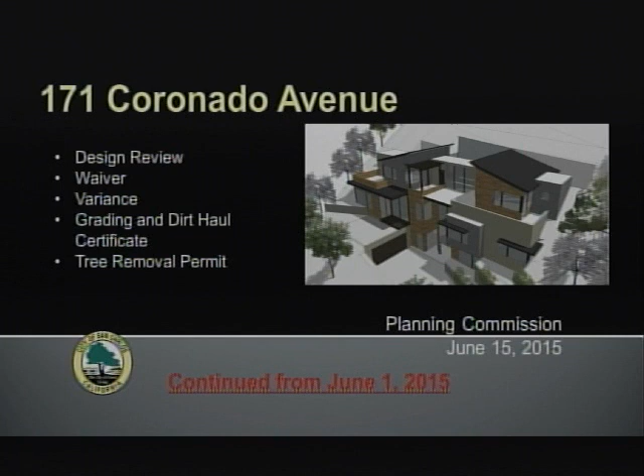So a summary of the Planning Commission meeting from June 1st. At the meeting, the Planning Commission heard the staff report as well as the applicant presentation and heard the request for the aforementioned entitlements. Several neighbors expressed concerns and the applicant also tried to respond to as many questions as possible. The Planning Commission specifically expressed concern with 3 aspects of the proposal and directed the applicant and staff to return with additional information with regard to these areas.

The first was in regards to a waiver that the applicant was requesting from the overall height requirement. The applicant was asking to have a waiver for an additional 3.5 feet in height, and the Planning Commission asked for a shadow study to determine the shading impact of that additional 3.5 feet on the downhill residences, specifically those across the street.

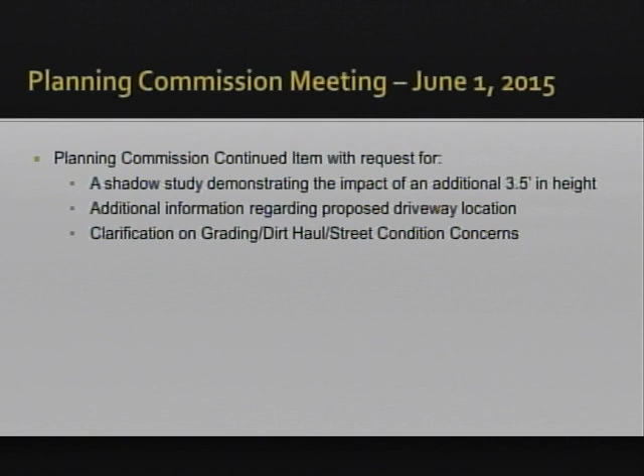Second, the Commission requested additional information regarding the driveway location. And finally, the Commission asked staff to follow up on concerns expressed by neighbors regarding grading and road conditions.

To start with the waiver request, as you are aware, the applicants are requesting a waiver to increase the overall height by 3.5 feet, which would raise the overall height to 38 feet, 6 inches as measured from the lowest point on the site to the highest.

On this slide, the red line indicates the maximum 35-foot height. The clouded areas are the areas that exceed that height limit and the reason for the request of the waiver. The line weights are a little light, so it's a bit difficult to see, but it's that area within the 2 clouds. As you can see, the area that extends past the maximum height is solely roof area.

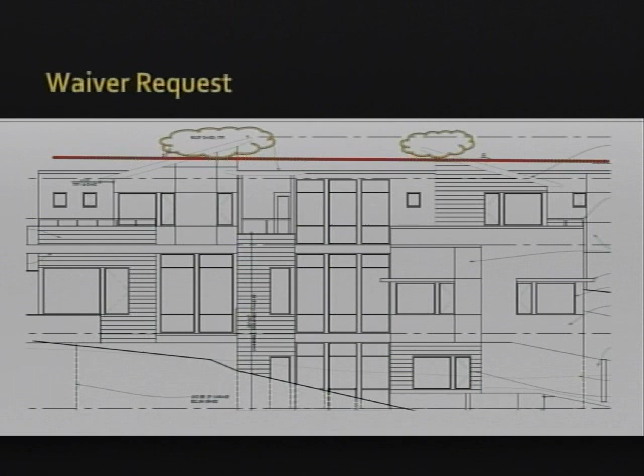As I mentioned, the Commission asked to see a shadow study to see what impact this would create. The applicant will be presenting on this a little bit more, but I just wanted to show a few different slides with this. This one specifically is the date, December 21st, and time 9 a.m., where the shadow is the longest.

The picture on the left is the flat roof, so were it to stay at 35 feet maximum allowed height, and the one on the right is the sloped roof. I clouded the areas where there's a difference, and as you can see, there's not much of one. It's a pretty minimal difference between the 2.

As I mentioned, the applicant will go through other times of the year and times of the day. Staff's opinion is that the sloped roofs would provide more architectural interest than the flat roofs, and is recommending approval of the waiver to allow this additional height, given that the shadows cast by it are pretty minimal compared to what is allowed.

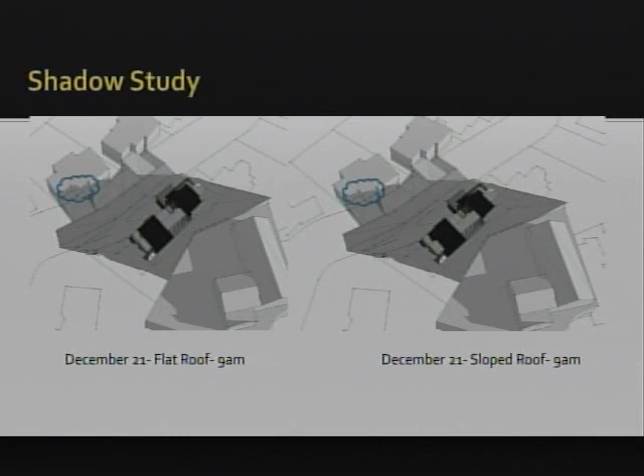In terms of the driveway configuration, the location of the driveway was reviewed with both Public Works and Fire. Public Works prepared a memo for the Commission, which is available on the dais and was also over there for anyone in the public who would like to see it. No objections were brought up with regard to the location of the driveway.

Public Works noted that the location of the driveway is no more dangerous than other locations or existing driveways within the neighborhood. In addition, all vehicles exiting driveways need to take caution and make sure conditions are clear for exiting regardless of the driveway location. Although not required by the city, the applicant could provide a backup area which would allow the car to exit face forward. In addition, there's no parking on the street, which will help with visibility.

As you are aware, the applicant is also proposing to remove several trees, some of those between the property at 171 Coronado, the subject site, and 181 Coronado. Removal of those trees would allow for greater visibility as cars proceed down the hill towards the street.

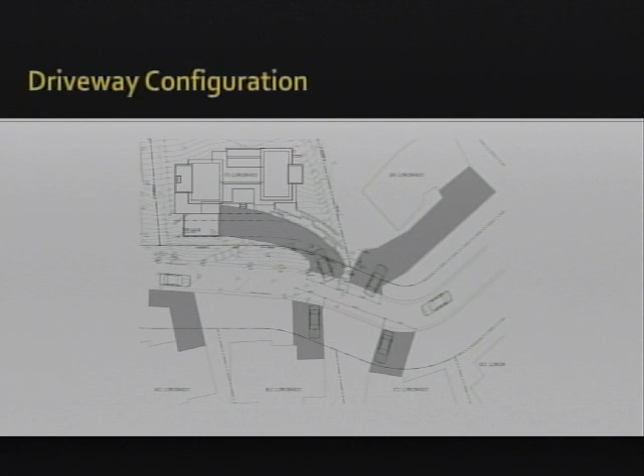Alternatively, the Planning Commission can require the garage to be located along the west portion of the lot, with the exit at the east or another alternative. If this is desired, more analysis would need to be done to determine where the driveway could exit and still maintain the 18% slope. The applicant has prepared a rendering showing the visual effects of relocating the driveway and will present on that shortly.

There are several items in terms of clarification with grading and also the dirt haul routes. A few things I wanted to bring up. Based on review of the concerns and discussion with the different departments, staff is proposing some changes to some of the conditions in the grading and dirt haul permit. The revised permit is at the dais and the changes are in blue. I'm going to go through each of those.

First is changing the dirt haul route to specify the difference between empty and full trucks and the route that each will take. The updated route will ensure that trucks do not need to turn around on the street or on site, which was a concern, and I will review the route shortly.

Condition number 18 has been removed, as conditions 27A and C have been revised to allow more discretion for the city in terms of what measures are taken to control dust as well as clean up roadways.

Condition 28 has been revised to require the pre and post construction survey to include from the site itself along Coronado to Windsor and Devonshire. This is with regard specifically to damage that any equipment might cause the roads. A pre-construction survey would be required, as well as a post-construction survey, so that the city may determine what damage was caused by the project and have that be repaired prior to any building division final.

And then the last condition, number 29, has been added, which would require all people along the dirt haul route to be notified 10 days prior to commencement of any grading or dirt haul activities.

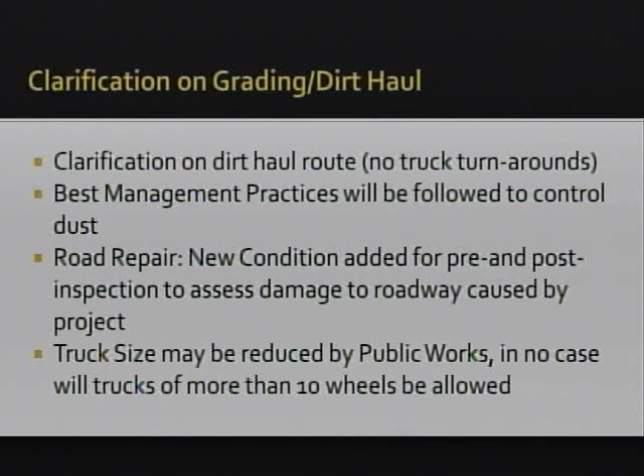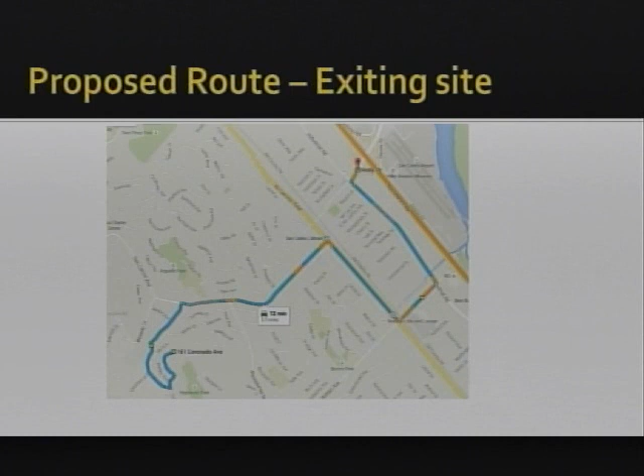The applicant also agreed to several conditions in response to the concerns, specifically limited construction hours, limited grading and dirt haul hours, and limiting the height of the trees to the rear so the rear neighbor's view will not be blocked. The applicant is also adding trees to the right of the property to help with privacy for that neighbor, and is proposing a revised landscape plan, which is up at the dais. This is different from the last landscape plan you saw on June 1st, and includes additional oaks being planted, which was another concern.

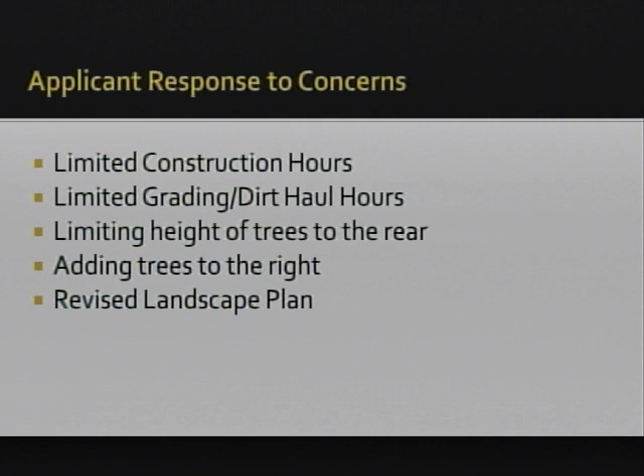Prior to closing, I wanted to mention that we received 3 emails after distribution of the staff report, all of which were provided to the commission and included as part of the administrative record. Staff is recommending that the Planning Commission approve several entitlements, including the code compliance certificate for design review, which includes the request for the exception for the garage setback and window trim, a waiver to exceed the overall height limit, variances for the natural state and downhill building face, the tree removal permit, and the grading and dirt haul certificate.

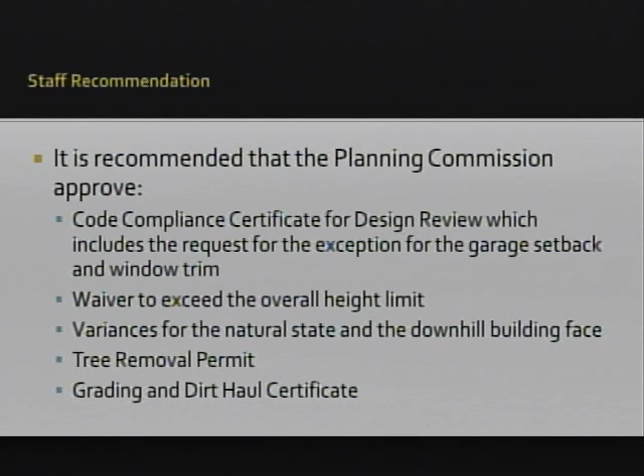Should you choose to approve this item, this is the formal motion you would make. I'm available for any questions, as is the applicant. Thank you.

Does anyone have any questions for staff at this particular moment? Not at this moment, no. Through the chair, if you'd like to wait until the applicant presents his presentation, we can take questions thereafter as well. That's fine. Okay, does the applicant have a presentation?

So just click this to go forward. Thank you, Andrea. My name is Ryan Morris. I'm the project architect for this, working with Ray Viotti at Viotti Architects, as Andrea mentioned.

Since a couple of you weren't here last time, I want to quickly talk about some of the challenges of this property to give more clarity to the decisions we'll discuss in a minute. This particular site is one of the more challenging I've dealt with, with a 62% average slope. As you can see on this diagram, the property line is above the street, that's the boldest red line on the left, by about 9 or 10 feet. So you're not even walking on the property until you've hiked up the hill and inward from the street.

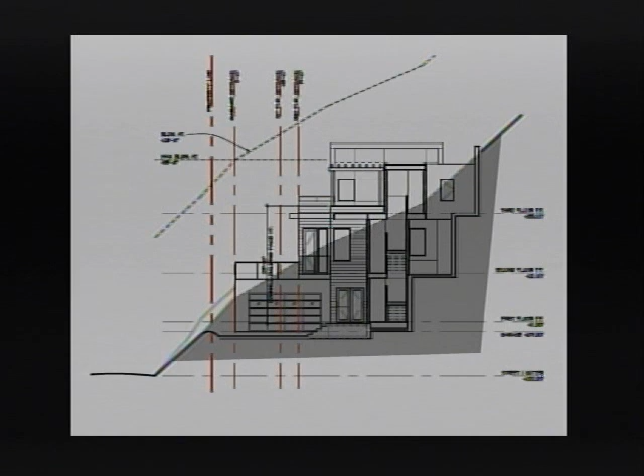We've done our best to minimize the massing of this structure. That was one of our primary goals, to keep it from being a bulky, looming mass hovering over the street, and gently step it up the hillside as much as we could. You can see the retaining walls that are below grade are stepped, and the front of the house as well, from the garage to the first floor to the second floor. We're trying to move it back up the hillside and break up the massing, articulate it.

It was asked at the last hearing that we do a sun study because of the building height and the waiver that we're requesting. So the following is going to be about 16 slides, I'm going to go through them quickly. The first 8 will be in the spring when the sun's higher and the shadows are not as exaggerated. The last 8 will be December 21st, the winter solstice, the lowest sun angle of the year, so it's the most extreme sun angle.

You'll see 4 different times of the day in the morning, from 9 a.m., 10 a.m., 11, and 12 noon. At each of those time periods, we'll compare the sloped roof and the flat roof.

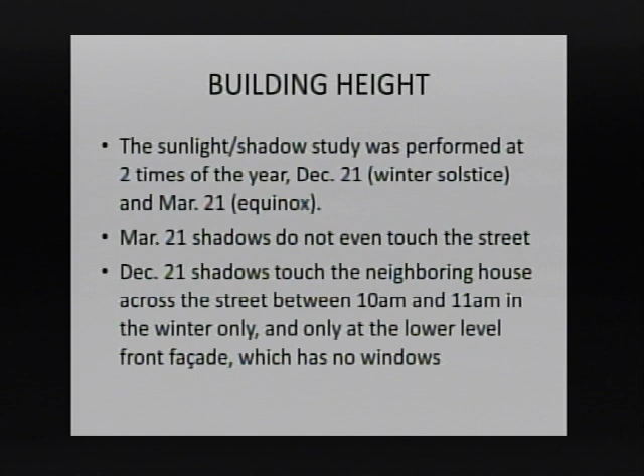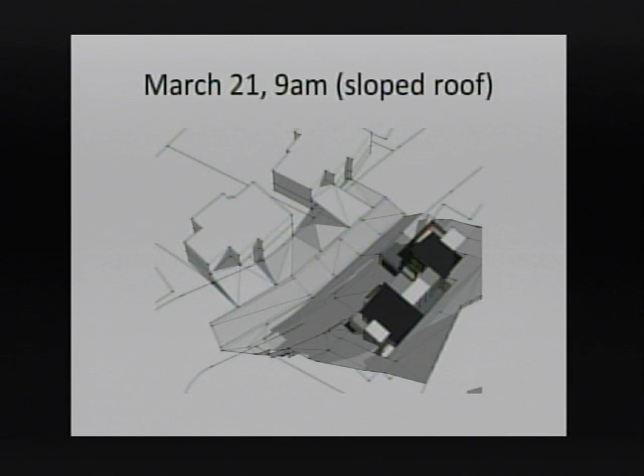So as I said, this is March in the morning. To orient yourself, the sun rises on the top right corner of this diagram, and it continues downward on the page to the bottom right, from east to west, and south side is on the right side of this image. You can see the shadows moving across to the right.

And now we're doing the same time of year with a flat roof. Okay, I'll go back and do that one more time. It kind of helps to go quickly. You can see the sun moving.

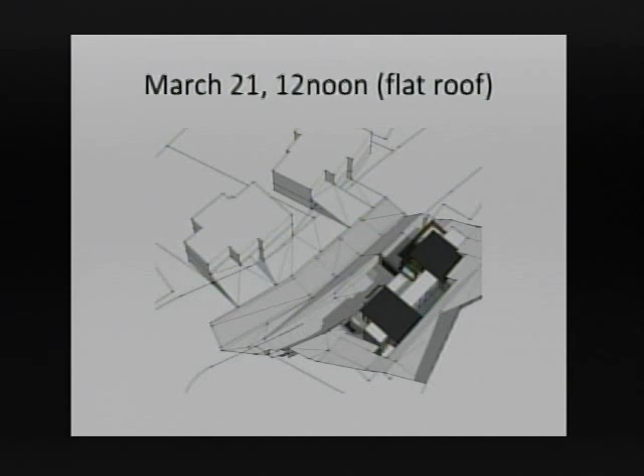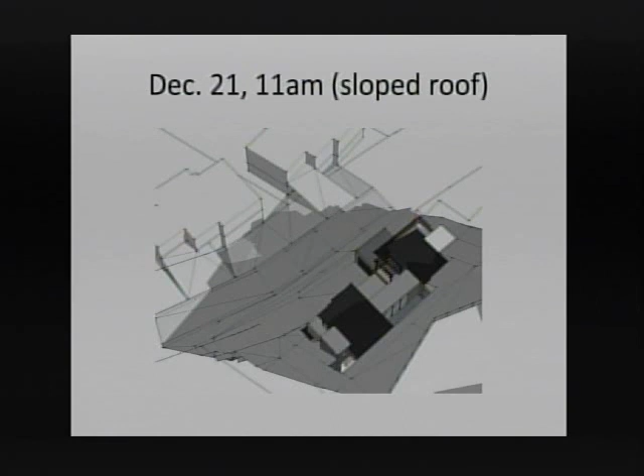At 10 a.m., the highest point of the shadow is about at the bottom of the front door. That line below the roof represents the first floor. And at 11, this is down at the level below the street, the shadow that's hitting the building. You can see the sloped roofs pretty clearly here.

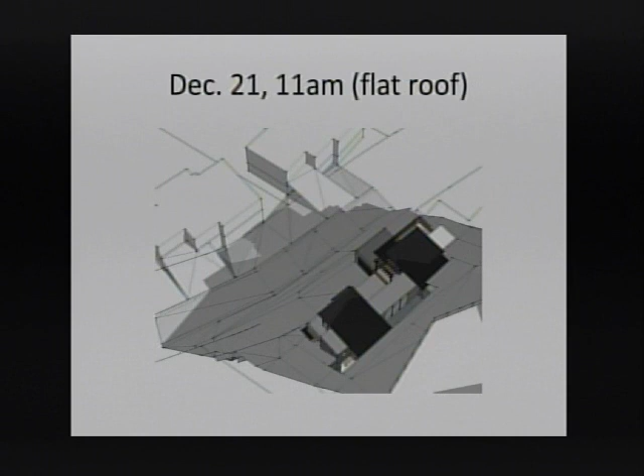And then with the flat roof, same shadows being cast across the front door of the neighboring building. Shadows don't quite touch the bottom of the front door. And then they disappear. There's the clear definition of the flat roof. I'll go through that quickly again, just for fun.

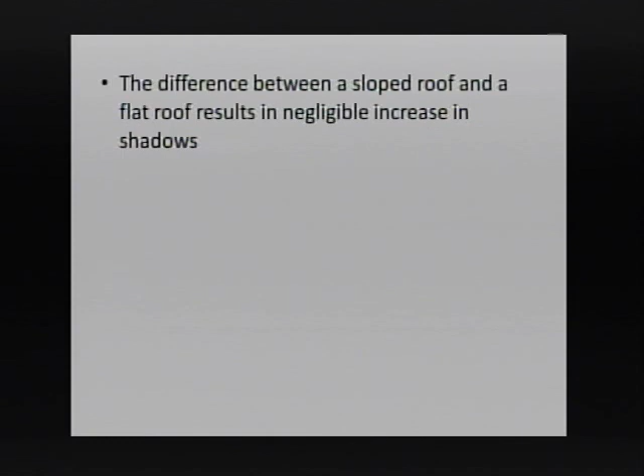In the winter, those few months or weeks, however long that may be, when the sun angle's at its steepest or most severe, it's not really affecting a whole lot of their interior spaces. And for that matter, the difference between a flat roof and a sloped roof we think is negligible. I think that's the reason this whole question came up, to see if we did not need the waiver for the sloped roof, if the neighbors could benefit from a flat roof. I don't think there's enough difference to make that case.

Another question that came up at the last meeting was whether the building height will block views from the neighbor above our house. As you see on the next image, the highest peak of our proposed roof at 171 is at least 20 feet below the deck of the property above us. No views are affected, and there's the exact measurements.

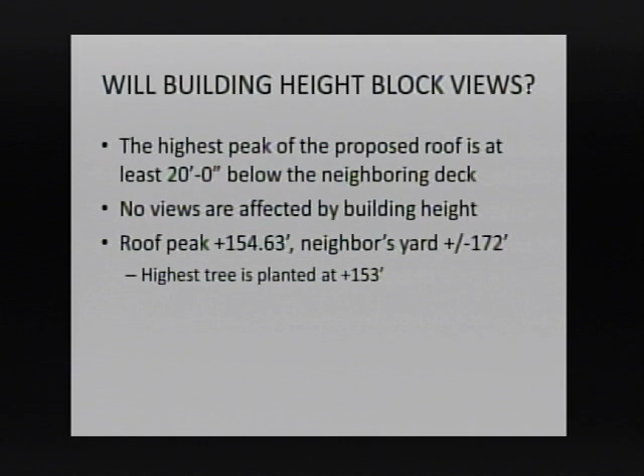We've also planted trees, which were a concern, and the highest tree's base is planted at 153, slightly below the roof peak. There's a measurement that's hard to read, but the distance isn't important. What you'll want to see is just how high above the roof of 171 the neighboring building is. Any trees would be planted at the roof peak or below.

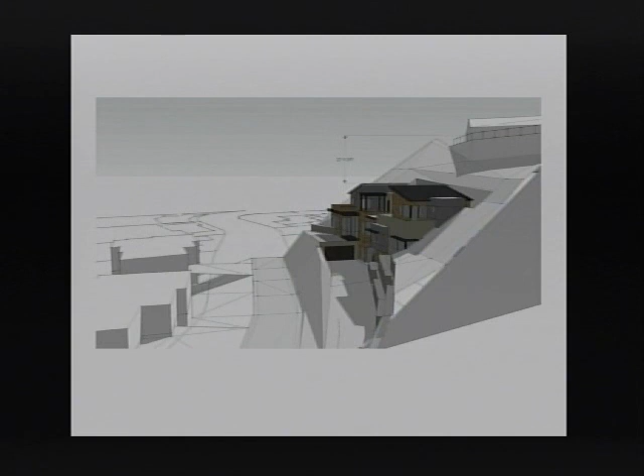Driveway location. We'll deal with this in several separate aspects, we'll study several separate aspects of the driveway.

One topic that came up was the separation between the two driveways at 171 and 181 Coronado. The separation that we measured after the meeting was almost 7 feet, about 6'10". Both driveways, as they enter the street, start out almost parallel to the street, but when the curb cut happens at the street curb, they're pretty much perpendicular to the street. So it's not like the cars are running into each other.

Furthermore, there's a fire hydrant and mailbox in between the two properties, and a retaining wall that's set back from the street curb about 4 or 5 feet. It was asked if we could provide bollards to prevent hitting the fire hydrant from our side of the driveway, and we're perfectly happy to do that.

And then the sight line from the driveway of 171 Coronado looking west towards the curved road has been a sensitive topic. Our property actually benefits from the retaining wall being pulled away from the street curb. It gives us more room to see towards that curved road, over the top of the fire hydrant and past the mailbox.

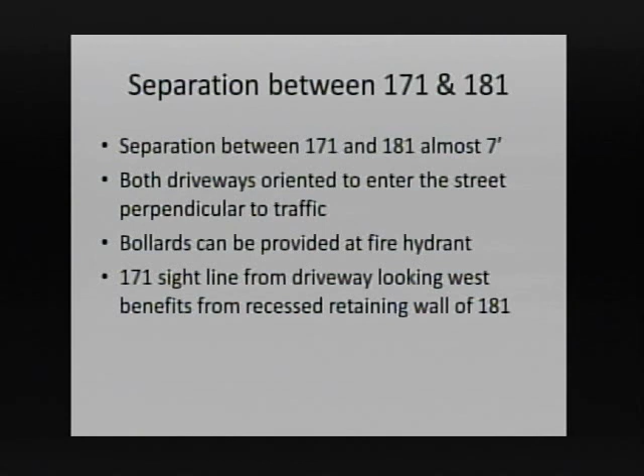And we are going to replace this tree with 6 more oak trees, 4 of which are on the property line border between 171 and 181.

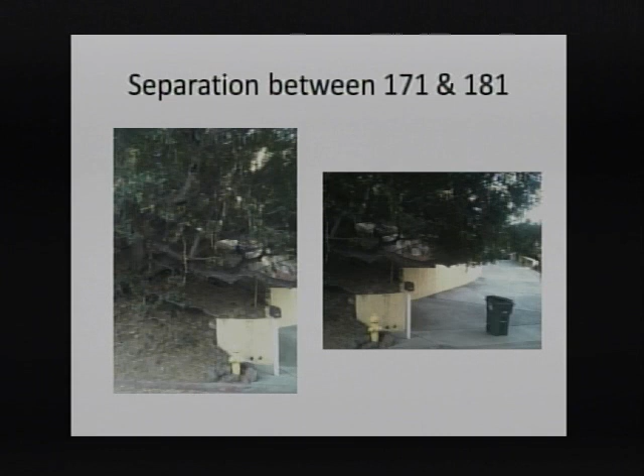The curved street, the road curves, Coronado Avenue curves from the west of 171, and it straightens out at 171. So our property is not on the curve, it's after the curve.

And we have provided adequate stopping area on our driveway on 171 in order for our clients to stop, watch for traffic, as I said, to look past the fire hydrant towards the curved road.

We're not aware of any San Carlos city standards that would require a different driveway design than what we've provided, or a specific sightline distance from the curve to the driveway. And we received an email today that said Public Works has no safety concerns for this driveway location.

Because this is sensitive, I'd like to point out that I don't think our driveway is contributing to the traffic safety issues. It seems like a pre-existing problem of this sharp corner, and other driveways exiting and entering into the street, and it seems like this could be solved by speed limit reduction, signs, sidewalks, other things that would benefit all neighbors, not just our neighbor.

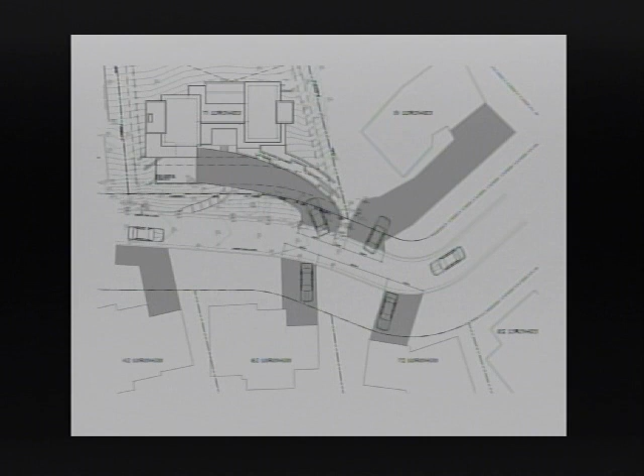Here's an early model we did when we looked at both driveway locations. This is a little exaggerated because where this driveway hits the street is actually where there's an existing street light. So if we did do this, the driveway would need to be even shorter than this.

I was not present, so I would just ask the question: if it's all the same to you, but the neighbors care that it's flipped, why wouldn't you flip it? Good question. Yeah, I've prepared some answers to that. Thank you.

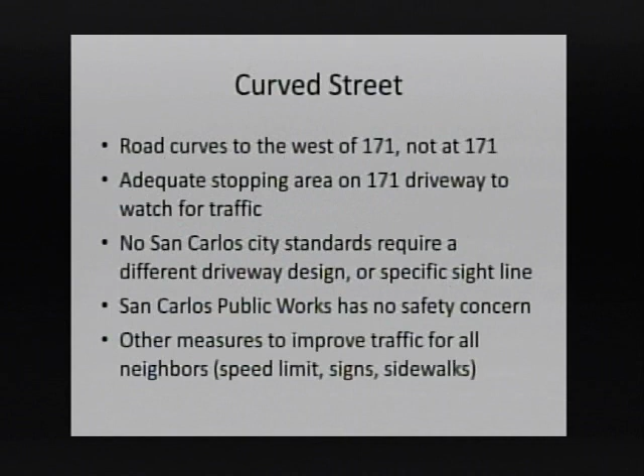First of all, there are 3 ways that we can improve the current design. Sorry, I'm just going in the order of my slides. We'll come back to it.

We can move the house 18 inches to the east. It is not right up against either the east or western setback lines, so there is room to slide the entire project 18 inches away from 171. We're happy to do so. I'll show you that on the next slide. It doesn't affect our design at all.

The second point is that we can provide a wider turnaround area at the top of our driveway in front of the garage. Technically it's not enough for a 3-point turn, it's more like an 18-point turn. Or if you bought a Mini, you could probably do it in less.

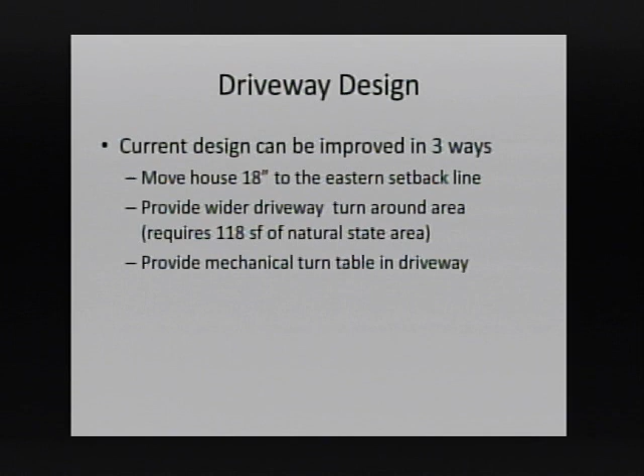But that extra room could be beneficial, especially if the third option is done, which we're not in favor of, but I'm just throwing it out there, that we could put a mechanical turntable in the driveway. This is done in San Francisco sometimes for tight garages, and you'll see right here, I've widened the rectangular gray area in front of the house to be 25 feet by 36 feet. That's option 2 that I discussed. And the turntable, typically they're about 15 or 16 feet, and it's a fancy luxury that we do not think is necessary.

But if it's important for the Planning Commission that our clients face forward when they're exiting their driveway, it is possible. You're not explaining why you wouldn't just flip it. Yeah, I'm getting to that. I think that at the last hearing, I apologize I wasn't there, but it was asked of us why, or whether or not we could face forward.

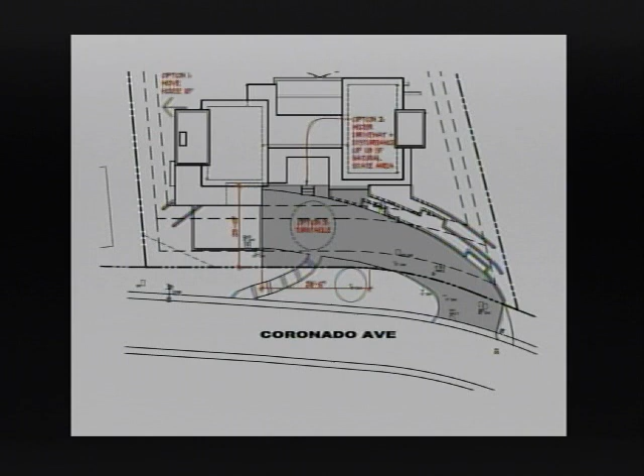Option 1 on the top left shows that there's a little bit of room to slide this house to the left, so an alternate driveway location.

In our opinion, this increases the garage massing adjacent to the street and defeats the purpose of our current design. As I said in the very beginning, we were trying really hard to keep the massing down on this structure and keep it up the hillside away from the street so it's not looming over the street.

As we just looked at, the garage, because of the contours of this site, is actually situated up on the hillside, and you'll have a garage wall facing the street, whereas in the current design, it's completely buried in the hillside. It's more costly the way we have proposed it because it's more excavation, but we much prefer having the garage hidden from sight from the street and only being able to see the top 2 stories of the house from the street.

Another reason why we would not do the flipped driveway is because the street light and a slope easement on the east side of the property restrict the driveway length, and it results in no height advantage for our house. I would very strongly entertain flipping the driveway if we benefited by being able to lift the house up higher and get out of the hillside and do less excavation. But since there's no gain, it gets us to the same elevation because it's a slightly shorter run.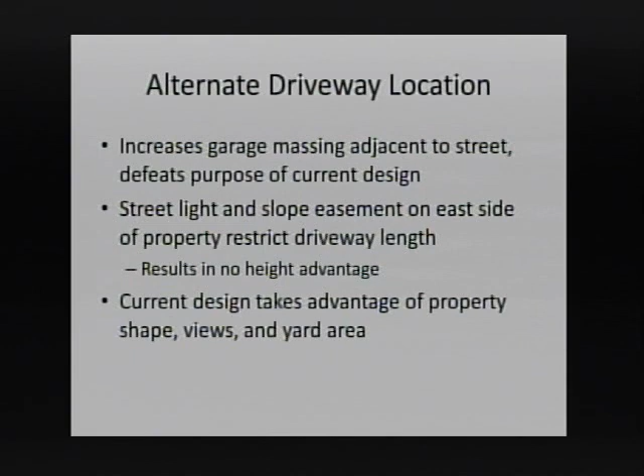Oh, and no height advantage. Here's a comparison: with the garage buried on the left side, the articulation of the roof on top, a little bit of yard space on the left side to the left of the garage.

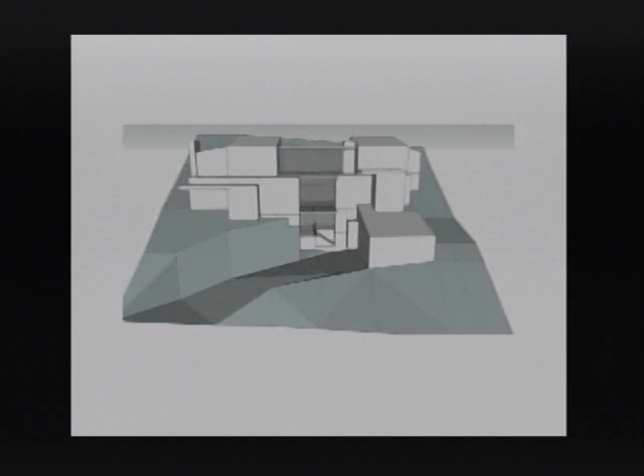I wrote this slide before I received some clarifications that Andrea mentioned, so you can ignore the bottom note. The top note was something written in the staff report about requiring 8 trees, and I would request that we reduce that to 6. I apologize, I don't have the numbers with me, but we have provided 4 oak trees along the street, 6 in total, 2 of them strawberry trees.

And then 4 oak trees along the property line between 171 and 181. This is the new landscape plan I'm discussing. We've replaced several of the trees that were considered non-native. The strawberry trees are native, but they're not as recognizable as the oak trees, and we've put in more oaks to try to preserve the streetscape for the neighborhood.

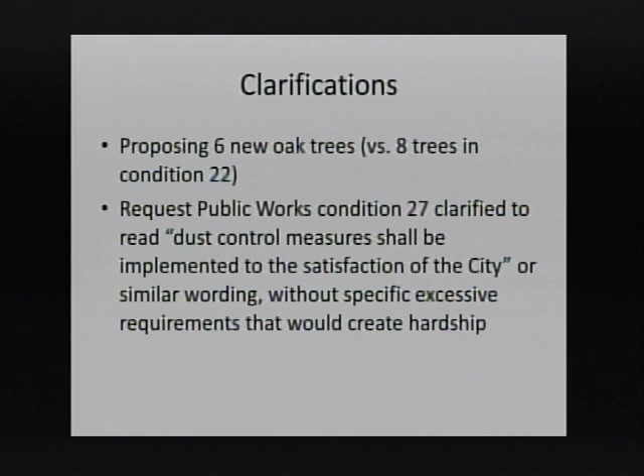Thank you. Does anyone have any questions for the applicant at this time?

Since you were mentioning the landscape plan, I'm looking at what was on the dais in front of us, and this is the new revised landscape plan, correct? So you'll be removing 1, 2, 3, 4, 5, 6, 7, 8 trees from the front of the property, correct? That's correct. In total, on the list on the left-hand side, there are 11 trees listed, and 10 of those are being removed, but 6 of them are only required to be replaced because of diameter. Thank you.

Any other questions for the applicant at this time? Just quickly, did you explore moving the light pole? I requested information about what process it would take. I found out it does not belong to PG&E, it's a San Carlos streetlight. I don't know what the process involves. Would that make a difference? It would help the driveway length, but I still don't think it helps the massing of the garage.

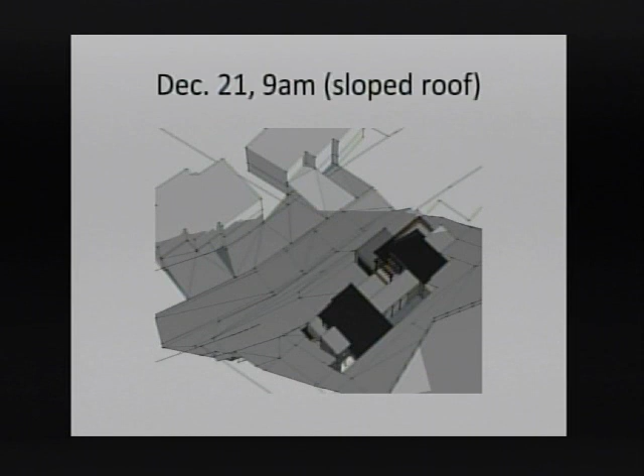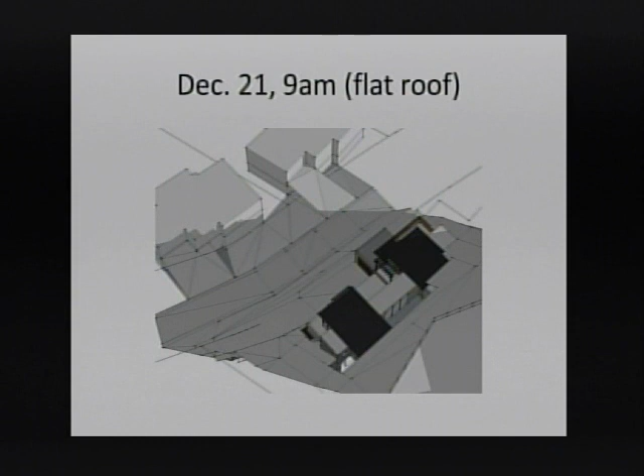And there is also no comparison of what it would be with the 3.5 foot difference, which I think is the variance you guys are requesting, right? Yeah, so they actually showed that, and you can show it again, but there's really no appreciable difference with the 3.5 feet. So you're saying between the flat roof and the sloped roof, that's the difference in the 3.5 feet? Yeah, they're entitled as of right to build 35 feet, which is why we wanted to see how the additional 3.5 feet impacted your home.

Sure. And based on the study they did, it indicates that the 3.5 feet has no appreciable impact on your home. When you look at the comparison slides, I can see like a little jagged edge difference, and it looks like it only really, and I'm not trying to minimize it, it obviously affects you, but based on the slides, the shadow is only going to be directly on your house about an hour a day in the winter. Okay, and that's about it.

And who determined this? I know the applicant's team is going to be on the side of the applicant. Does the Planning Commission review it and say there really is no appreciable blocking of the light at all? Well, I mean, we did, we're looking at the slides. If you're asking whether we're independently evaluating the quality of their study, presumably staff is doing that. We don't have the capability to do that ourselves.

Yeah, it's hard to track here, but it's kind of going horizontally. You can see it touching a little bit of the driveway, and then it, as I remember, it swoops up towards the right, but it doesn't go straight vertically. That shadow that's touching his driveway right now, as the sun curves, it kind of makes an arc across the front of his house. So it does touch his house? No, across the front of his yard.

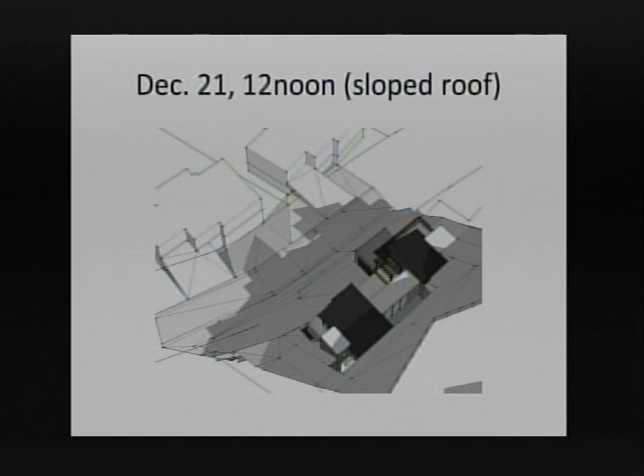Okay. And as far as the retaining wall, I'm not sure how they'll build it. I think what our neighbor has said seems very logical, and it will be a challenge to maintain the slope of the hillside in front of the driveway. We're just going to depend on our contractor to achieve that.

Ms. Lada? Hello there. I have a couple concerns.

The tree height. On the plan, it indicates that on the right side, that's bordering 181 Coronado, indicates about 4 trees, oak trees, being replaced. There are no oak trees on the left on the second half of the property towards my property of 41 Elston Court. So what's the height of these live oak trees? It indicates in the plan that it's not going to reach my property line, but I want to know the height. And I want to know if it does grow past it, what are our options? Who's going to trim it? Who's going to pay for it? And how is it going to get executed?

So do they have an answer for that? And what I think that's actually in ordinances, right? Isn't that just normal ordinance if some tree grows on your side of the property, or are you talking about some provisions ahead of time that we're thinking about?

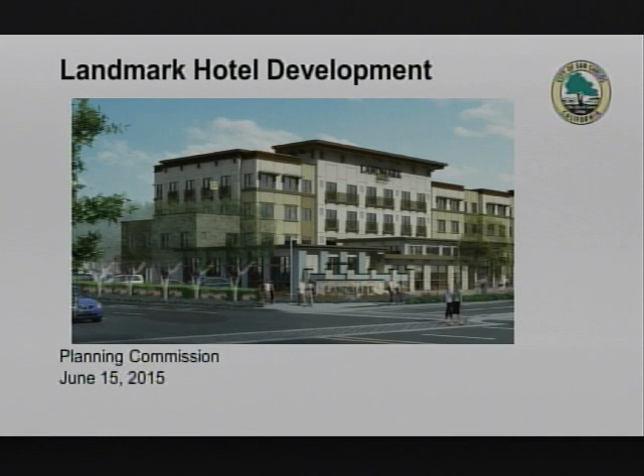Compare this a little bit to that new condominium or apartment complex going in where Foodville is, which is also very beautiful—Wheeler Plaza. Yes, and the way they've integrated that into the neighboring and adjacent areas is they've brought restaurants on the ground floor, beautiful because it's on Laurel Street, so that integrates Laurel Street with that complex. And then they've also made this passageway from Laurel through to Elm Street, where the library is and other aspects of our community, which is also really great. So you look at that and think, wow, it's really kind of intertwined with the whole community, and it's very cool. So when I look at this, I think, well, why not? Why can't we just... that's just such a small win, not just for the neighborhood because I'm from there, but it just looks like it fits in better.

So it's connected, and it's just a nice thing. If I were those people, that's probably what I'd want to do. Shortest distance between A and B is a straight line, that type of thing. So anyways, I'm just reiterating that. I think it'd be really cool.

And I don't think it takes much adjustment, just a little bit of improvement. So that's number one. And then the second thing, I just wanted to applaud Paul for all his research on that PCB issue. That's just amazing.

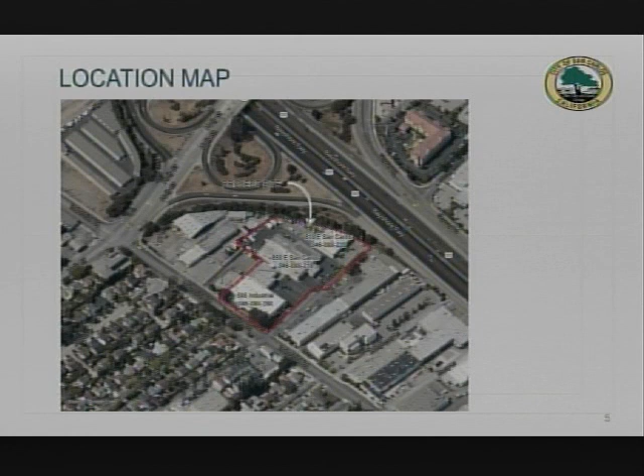In terms of the site, this is the site, and you see the three parcels in red there—those are the landmark parcels we're talking about. But as Mr. Singh noted, there are actually five properties in all at that industrial location at Hawley Street. These properties were rezoned by the City Council to landmark zoning to signal to the marketplace that the city wanted any use there to be consistent with the long-term land use goals of the city.

But why a hotel development? A hotel development on the landmark site has long been sought by the city as a means to increase the recurring diversity of our general fund revenues, and it would also have significant benefits for employment in our community, contributing to economic sustainability. A new hotel would also be an amenity for local businesses and a place for our community to gather and host out-of-town guests.

In terms of the development program, it's an extended stay upscale hotel with 204 rooms. There are on-site amenities for guests, a meeting room, and the grounds are available for public use. As one speaker mentioned, the corner of East San Carlos and Industrial is an important intersection for hotel guests to cross the street safely, and for traffic, as you know, driving through there now with all the traffic.

There is a lot of traffic at this point, and a big improvement would be to put a signal there and a crosswalk across the street. That's what you saw in the photo we showed you at the very beginning. That would be done by the city of San Carlos - a new light at that intersection, as well as a crosswalk across. There's 136 new on-site trees in the Greater East San Carlos neighborhood. At the meetings, there was a request for landscaping on the west side of Industrial to help screen the hotel and also for aesthetic purposes.

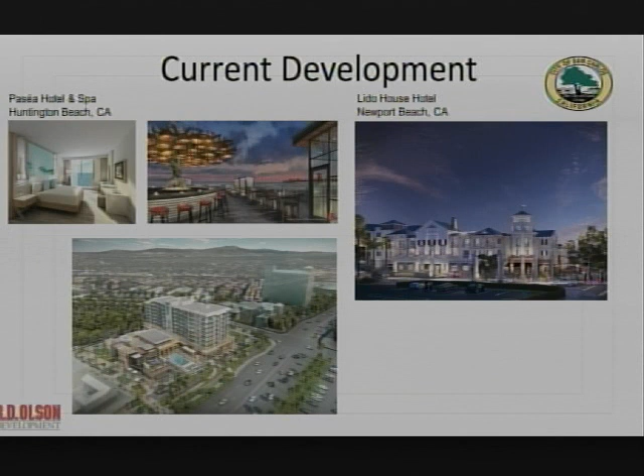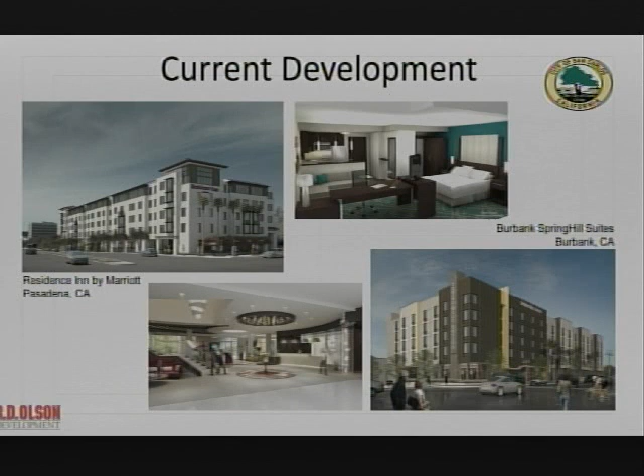And with that, I'd like to pass this along to an architect, Jeremy Grant with DLR Group.

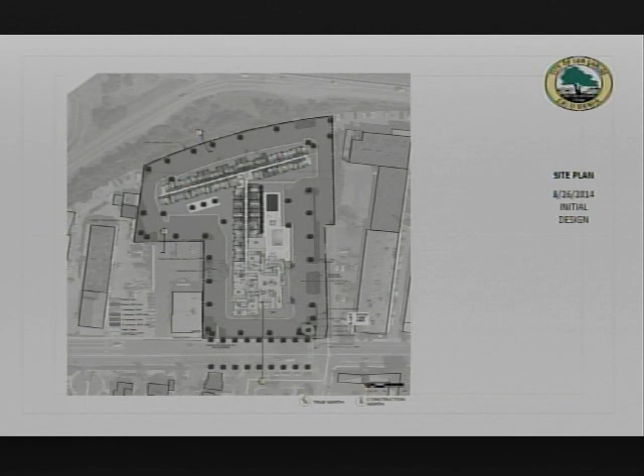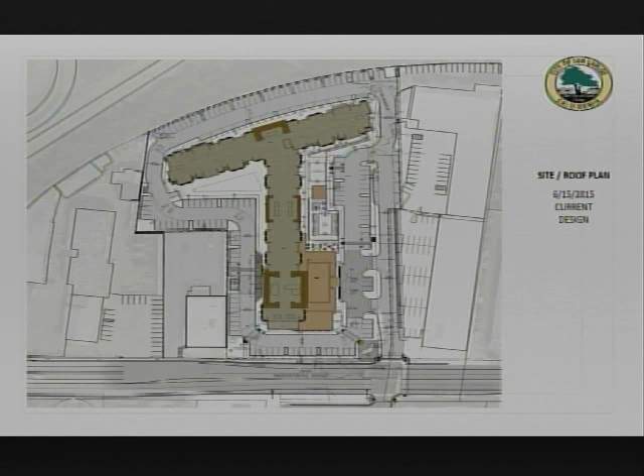At the start of the project, we pushed the building up to 50 feet from the curb. Right now it's a 10-foot setback, so we're pushing the building back 40 more feet. We were looking at a typical guest room floor, starting from the closest to Industrial Road, going all the way up, so a 4-story mass right at that Industrial Road frontage. Here we've moved the building back 4 more feet, and stepped back the building on the 3rd and 4th floors an additional 17 feet, so the face of the building is 54 feet from Industrial Road. As it sits, the current existing building is approximately the same height, but it is very close, about 16 feet from the curb.

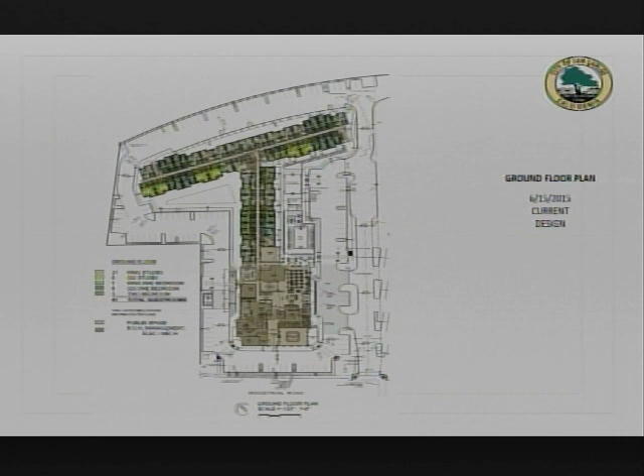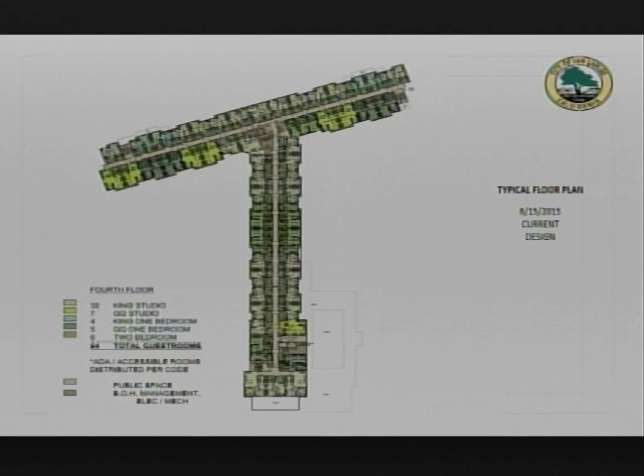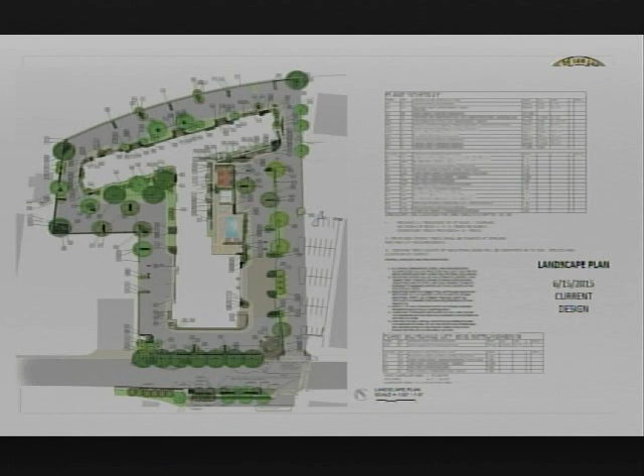Right now the landscaping is dying out there, so we're proposing new landscaping and a plan to maintain that going forward. You can see the blow up of that area—this is all off-site on the west side. You can also see the parklets. To the right, we have a small hardscape area with plenty of native, drought-tolerant plantings, sort of the entrance to our project for pedestrians and residents.

You can see the enhancements to the crosswalks that bridge Industrial Road into our project and our project into Greater San Carlos. We've provided a walkable environment for the residents and the public—they can freely walk around our project, enjoy the landscape, enjoy the architecture.

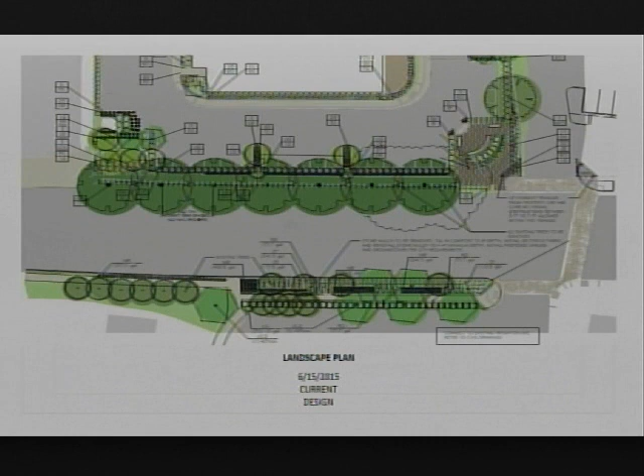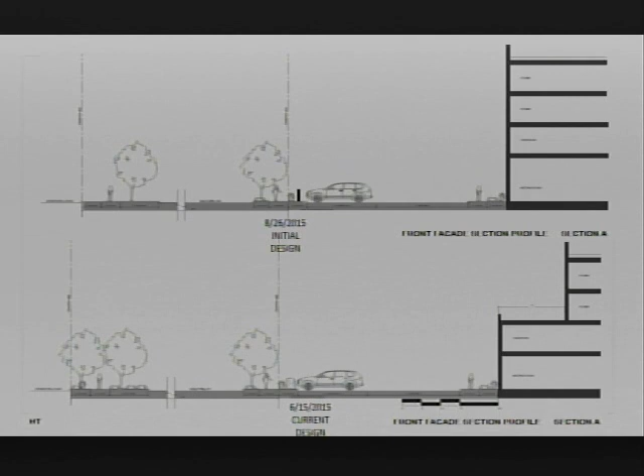Here you can see a diagram: on the top, our initial scheme maximized that volume, but we heard the Greater East San Carlos community, so we reduced that impact on all floors, pushing back the 3rd and 4th floors that additional 17 feet. You can see the difference in landscape treatment of the street frontage as well—we've over doubled the landscape on the west side. We had proposed a screening wall to block the view of vehicles, but we've replaced that with a tall hedge at the request of the residents, and also increased the size of the trees as they'll be planted, so they'll be more mature.

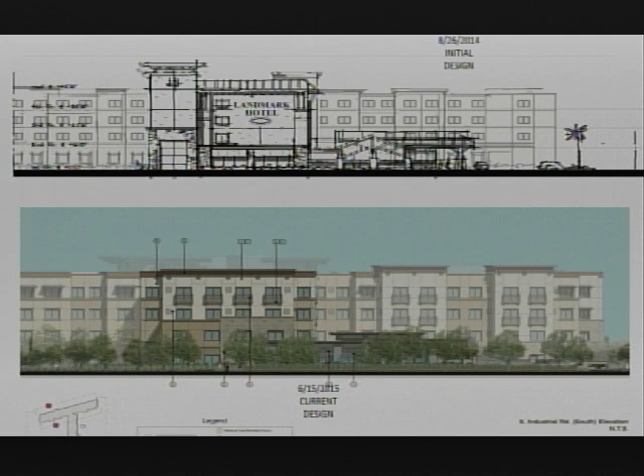You can see our initial scheme on architecture—we've come a long way. We now refer to this as a refined contemporary craftsman style, more reflective of the region, the greater Bay Area and San Carlos. You can see we've worked on the proportion, the scaling, the vocabulary of the architecture. I'd say the initial design was at best a little interesting, but we've added a lot of detail, like wood balconies, soaring roof planes, and plenty of variation in color.

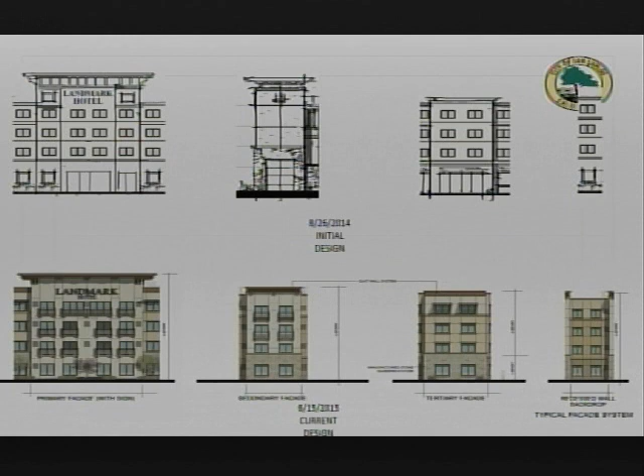We've heard planning's requests for a base, middle, and top design, and a varied parapet to break up the massing and scale of the project. Here you can see an overall view, and the changes. There's a primary and a secondary language there.

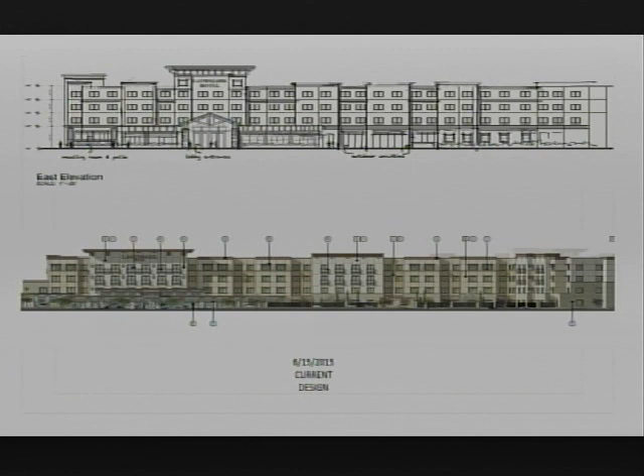We're also screening any public guest amenity, such as the pool deck and sports courts, with plantings. Here's the freeway side.

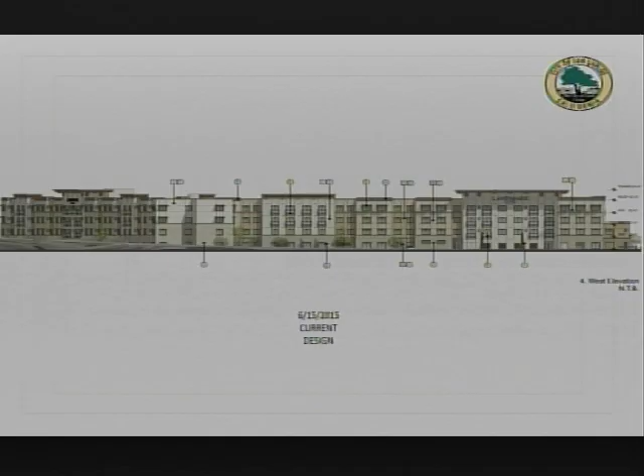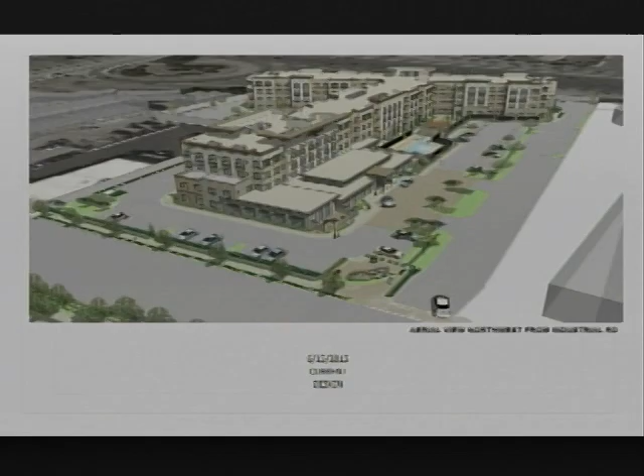Here's an initial massing. Pay close attention to the area fronting Industrial Road. You can see the high massing, and in this scheme it's been stepped back, with layering of landscape to soften that as well.

Another view of that corner at East San Carlos and Industrial. It's a mix of 1 and 2 story along the frontage now instead of a 4-story mass.

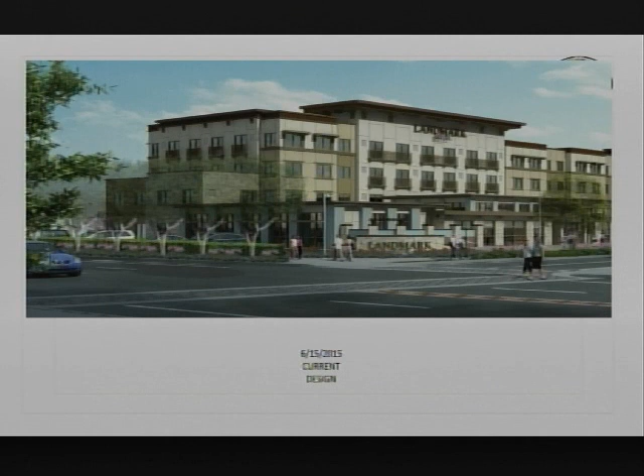I'd like to talk about how we want to provide an amenity to the public of San Carlos. The first step is that crosswalk and intersection, making it safe for the pedestrian and our guests to travel and use the retail and park environments.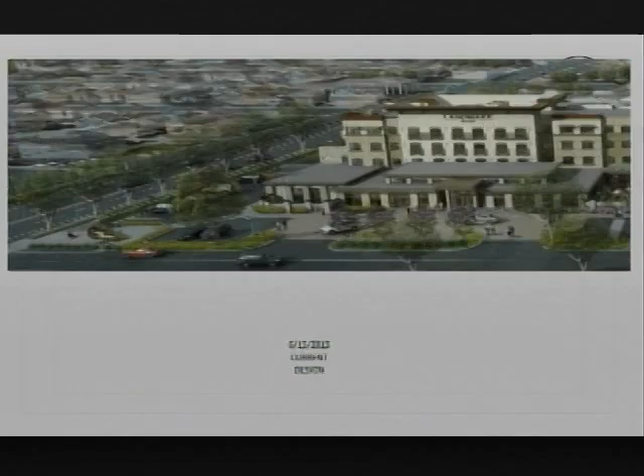Here you can see the entry, softened with plenty of landscape, very mature trees, very large trees. Here's the screened pool and barbecue, outdoor patio, and recreation areas.

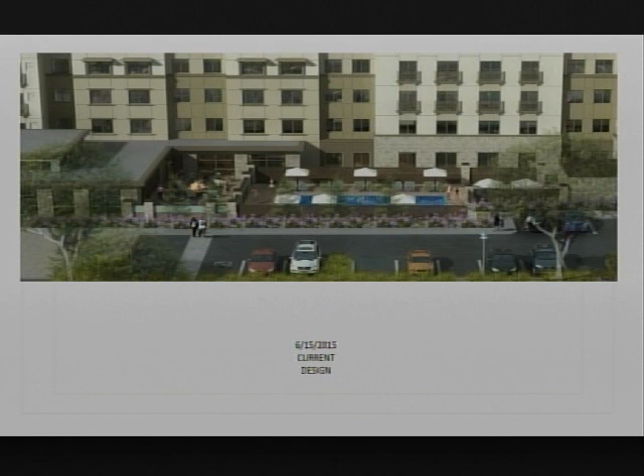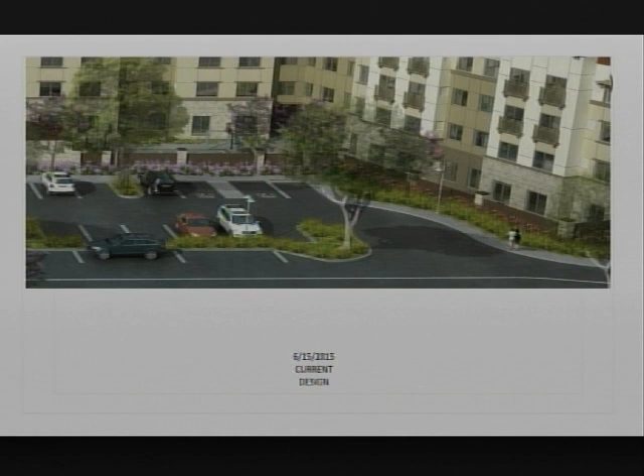Here's something I'd like to touch on again, the walking path around the project. Fully accessible, 360 degrees around the hotel, lush landscape, all native and drought tolerant.

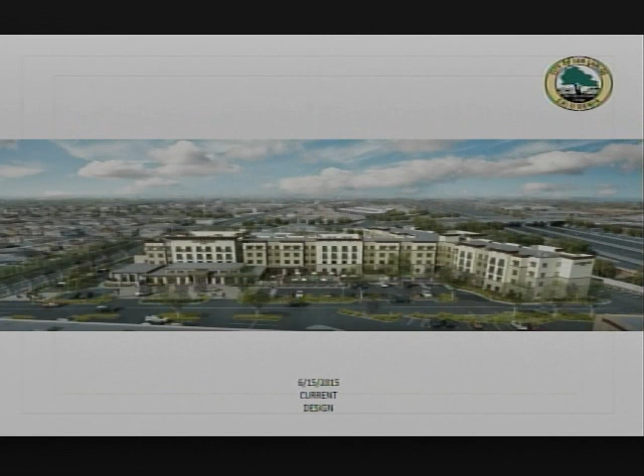Here you can see the siding of the building, the tall new development in the background, the other industrial buildings, tall buildings in the background. I think that's kind of my stopping point.

Maybe I can just touch on that we're using a lot of stone along the base, smooth plaster, slat wall system, and wood detail, inset windows, storefront glazing, and the landscape ties it all together. So we're using a large variation in materials and surfaces and planes, and that's just in working with the community to tailor this project to something that's acceptable.

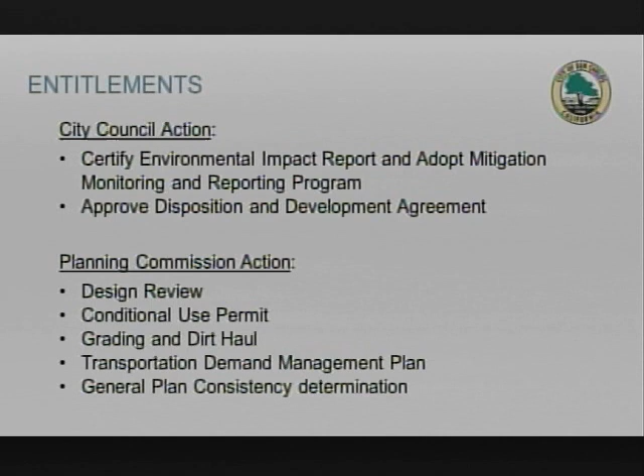The first item, we have prepared an environmental impact report. The consultant that prepared that document is here this evening, as well as the traffic engineer. As I indicated, it would be a recommendation to the City Council for certification.

A scoping meeting was held in September, and the draft EIR was available for public review in very early February. We did receive comments on those documents, and all of those comments have been responded to in the final EIR. The EIR evaluated the potential impacts of the project, and with the implementation of the mitigation measures, all potential impacts are considered less than significant.

The Mitigation Monitoring and Reporting Program implements those mitigation measures outlined in the EIR. The mitigation measures include best management practices during construction, dust control, stormwater measures, as well as the remediation of any hazardous materials found in the soil and in the building.

Implement the recommendations of the geotechnical report. As you know, we're in an earthquake zone, so we would need to follow those recommendations through the course of construction, as well as prepare an acoustical study relating to interior noise, given its proximity to the freeway. There's also a requirement to raise the building pad out of the floodplain.

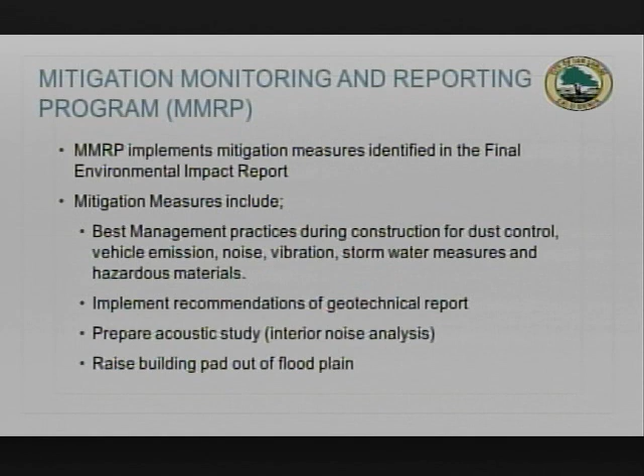The design review is an item before the Planning Commission to review and approve the design of the new building. As reviewed by the architect, it does require high quality design with architectural details. We did have this design peer reviewed by another architect, and they were able to incorporate comments that really enhance the design.

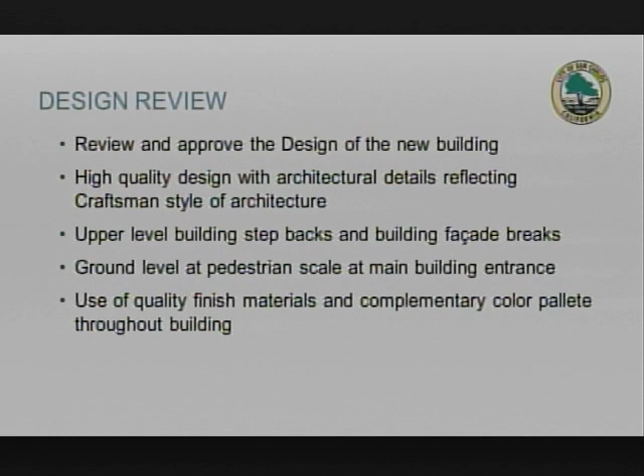The upper level building does step back, and there are many building facade breaks. Ground level is of pedestrian scale with a main building entrance, and the use of high quality finished materials and a complementary color palette. The conditional use permit: this use is considered conditional as a hotel in the GCI zoning district. The use is consistent with the general plan and zoning designation, and the project does comply with the objective standards of the GCI zoning district.

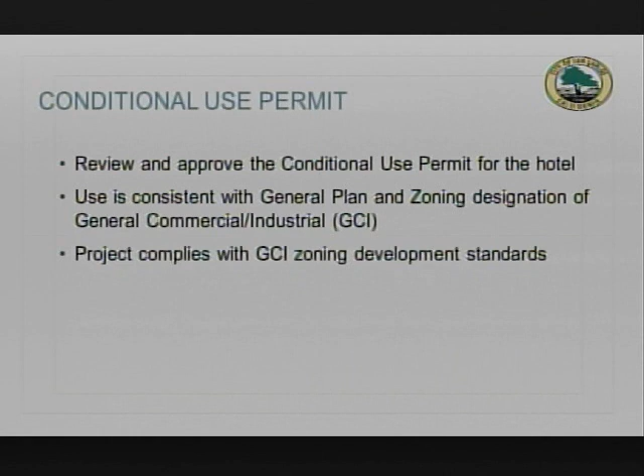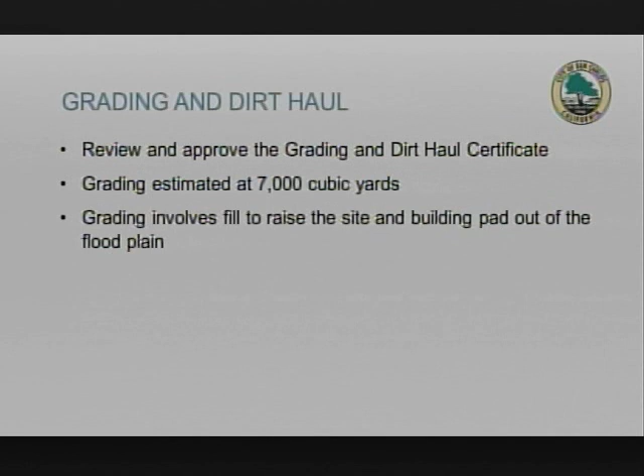The grading and dirt haul, we have that before you for your consideration. The grading is estimated at 7,000 cubic yards, and that's to raise the building pad out of the floodplain. The haul route would be from Holly Street to industrial, so it would not go through the residential neighborhood, and then accessing the site.

The Transportation Demand Management Plan is also an item before the Planning Commission for consideration. The hotel will provide a shuttle for its guests. There are also on-site measures that include bicycle storage, transit information, and employee showers. And we've added conditions to the certificates as well to enhance that TDM plan a bit.

That's a condition for a bike loan program, so that the hotel would provide bikes to hotel guests on a loaner basis. And then also to train the front counter staff on local transit information so they can better educate guests on how to use public transportation.

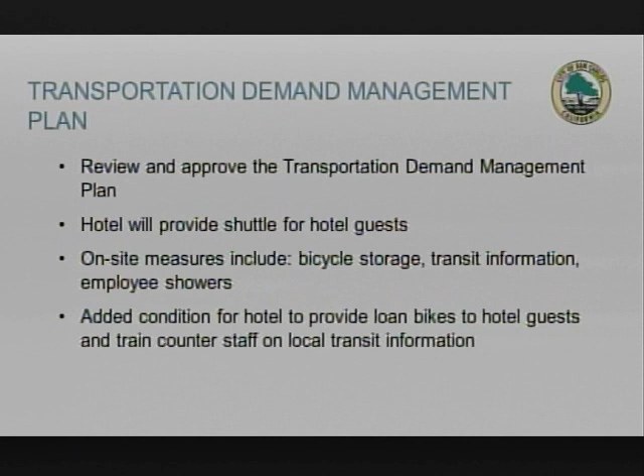There is a requirement in state planning and zoning law, California Government Code, that requires that for the disposition of any property by the city, the Planning Commission make a finding of general plan consistency. We've outlined in your staff report that those findings can be made, as this project is consistent with the general plan designation.

The next steps would be upon recommendation of the Planning Commission. This item would move forward to City Council for consideration of the EIR and the Mitigation Monitoring and Reporting Program. Then the City Council would also consider the Disposition and Development Agreement, demolition of the buildings, and start construction, hopefully in fall of this year with project completion in spring.

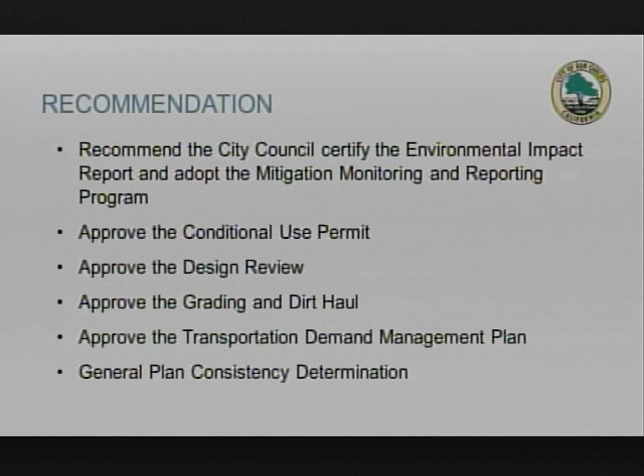We have the recommendation as well as the formal motion, and at this time we'd be happy to try to answer any questions. And as Al indicated, we have a whole team here for you.

Okay, well, I know we have staff from... Mr. Savé indicated we had two different types of environmental staff. I'm sorry, excuse me, one quick note.